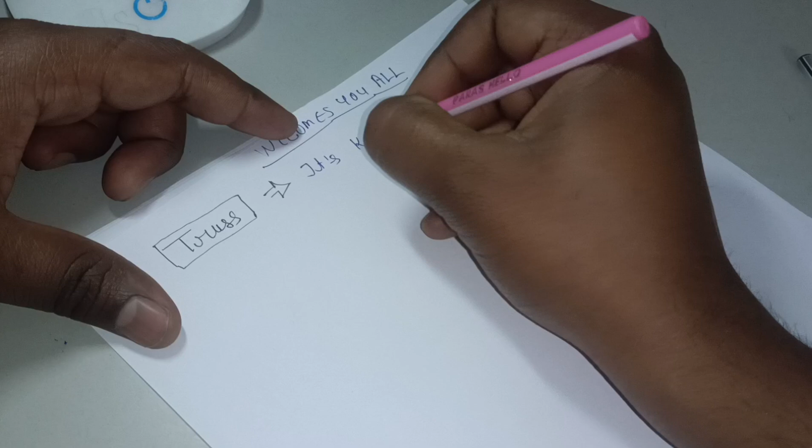So what is truss? If we want to write a definition, we can write it's a kind of rigid structure, rigid minded. What is rigid? What are rigid bodies? We can say rigid bodies are when we apply force on a body, the shape of the body, the dimension of the body, and the size of the body do not change, it remains same. That is called rigidity of a body. So truss is a kind of rigid structure.

Which consists of several, meaning many, members pin connected together to support a load.

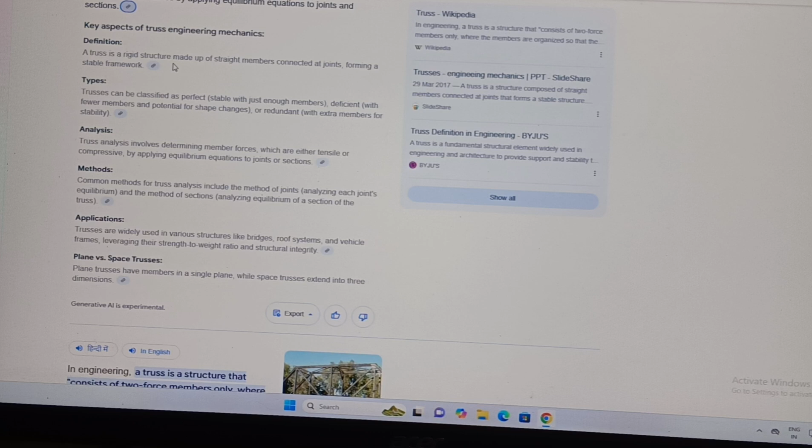Now, key aspects of truss engineering definition. A truss is a rigid structure, which I have told you. What does it mean by rigid? Rigid means if we apply force on a rigid body, then the dimension, the shape, and the deformation does not happen on that. So that is called a rigid body.

So a truss is a rigid structure made up of straight members connected at joints, forming a stable framework. Types of trusses can be classified as perfect truss and imperfect truss. What does perfect truss mean? If it satisfies the formula n equals 2j minus 3, where j is the number of joints and n is the number of members, then it is perfect.

If not, then it is imperfect. So this is something which he is trying to say in Google, okay.

So now let's see the types we have done. Analysis. Truss analysis involves determining members' forces, which are either tensile or compressive, by applying equilibrium equations to joints or sections.

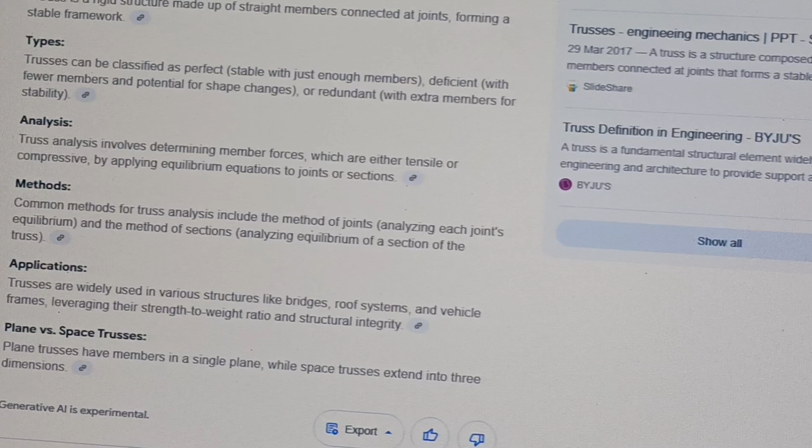Methods. Common methods for truss analysis include the method of joints, analyzing each joint's equilibrium, and the method of sections, analyzing the equilibrium of a section of the truss. Applications. Trusses are widely used in various structures like bridges, roof systems, which I have told you, and vehicle frames, leveraging their strength-to-weight ratio and structural integrity.

Plane versus space trusses. Plane trusses have members in a single plane, space trusses extend into three dimensions. So I hope I have told you this is the structure of these trusses. A truss structure consists of two-force members only, where the members are organized so that the assembly as a whole behaves like one.

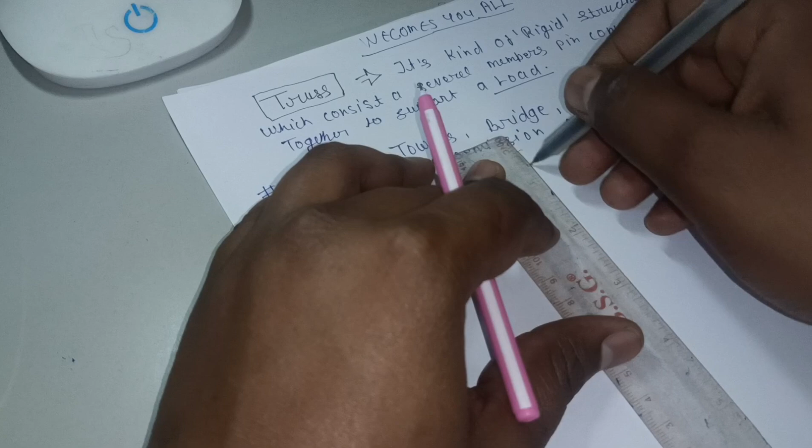So what question? Just take one example. I want to utilize maximum of this page, so I'm just drawing this in between.

Example, suppose we have a question. These are truss. This is A, this is B, this is C, this is D, this is E, this is F, this is G.

And one more thing, angles are also given: 60 degree, and this is also 60 degree, this is also 60 degree.

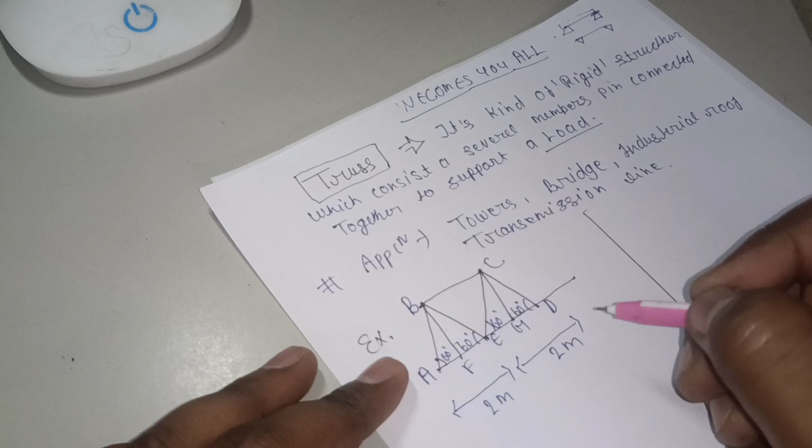Some more data is also given, like from A to E distance is 2 meter, from E to D distance is again 2 meter, total distance is 4 meter, and the force also given, it is 60 kilonewton. This is force, given downside, 60 kilonewton.

So now most of the time question will ask, now we have to find force at each point. What do I mean by each point? A, B, C, D, E, F, G. Each point we have to find the force.

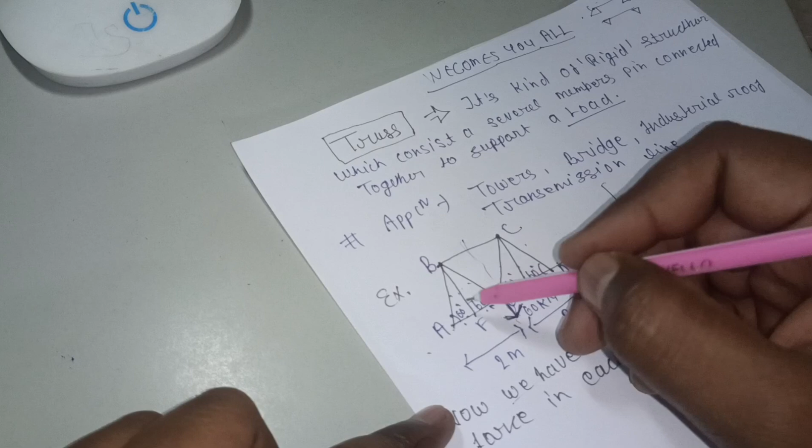Each point we have to find it. Now here I have several members. What do I mean by members? These lines are called members, 1 2 3 4, so these are members.

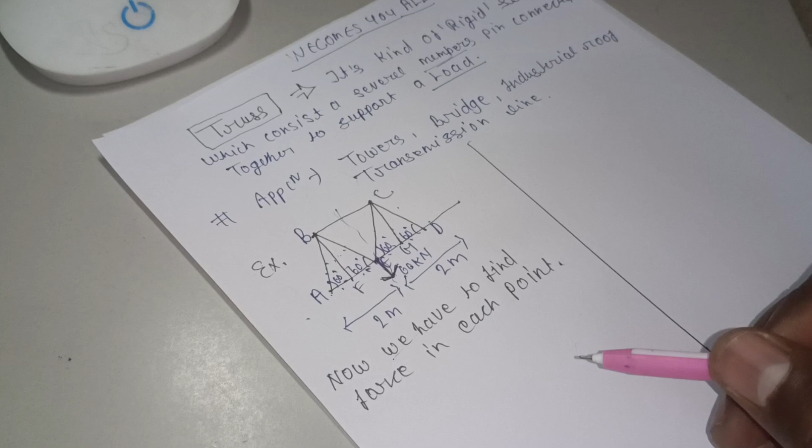So let's firstly see what should we do right now. Solution: first of all we have to draw a support reaction. One more thing which I have forgotten, these are trusses. Firstly, draw all reaction forces.

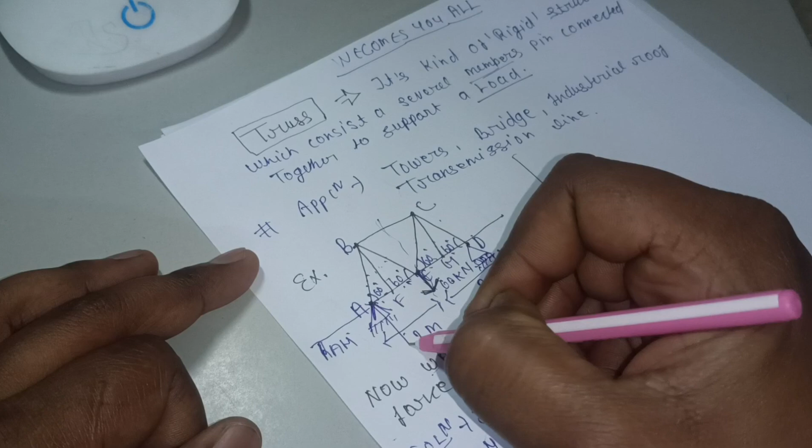So what are the reaction forces? We can see here. This is point A and the force is along horizontal, so reaction force will be RAH. Same here, there will be a vertical force, so reaction force will be RAV, V means vertical. And same thing also here, there's not any horizontal force, only vertical force, so here will be at point D, the RD force. These are reaction forces.

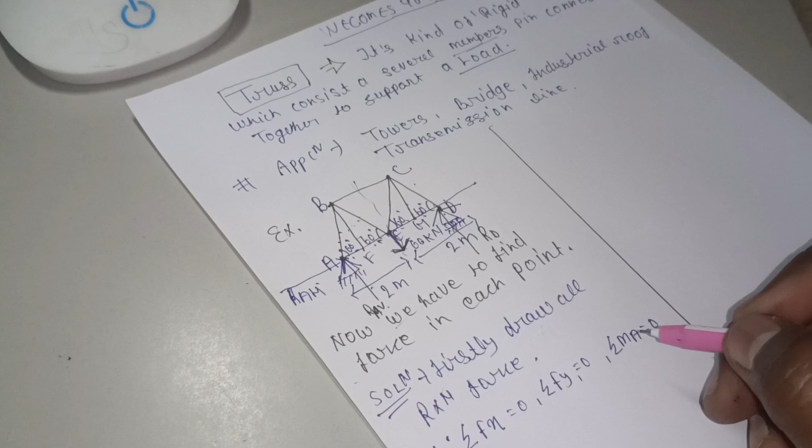So now we have to find summation of Fx, summation of Fy, and moment at point A, because first we will find the force at point A, that's why.

So summation of Fx, what do I mean by this? How many forces are applying in the x direction. X direction means horizontal direction. So this is only one force, which is RAH. So I can write only one force, RAH is equal to 0.

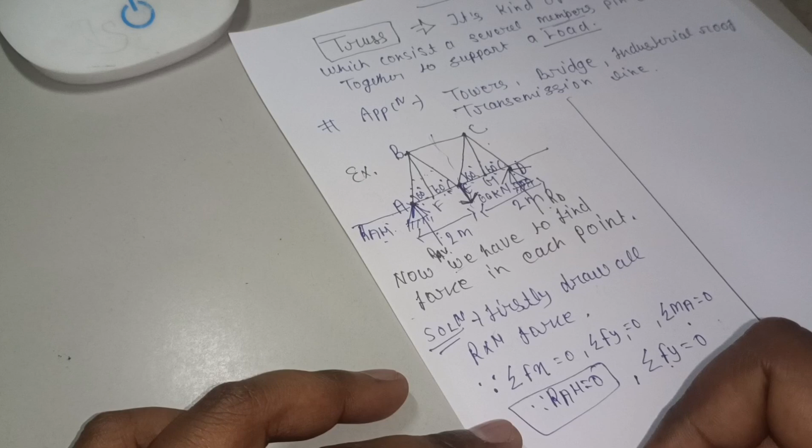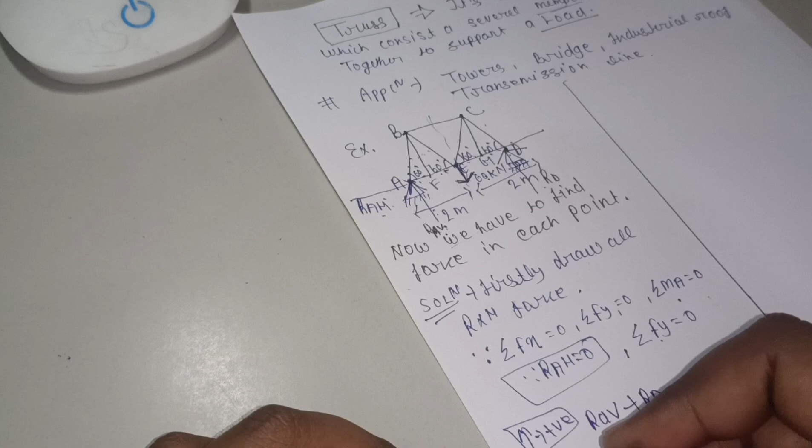And now we can find summation of Fy. What do I mean by summation of Fy? How many forces are applying in vertical direction. This is RAV in vertical direction, and this is also RD in vertical direction. This is upper side, if force is upper side then we take positive. So RAV plus RD, and this 60 kilonewton is downward, so if it is downward then we take negative. Minus 60 is equal to 0.

So firstly we need to know RD, because we don't know it, that's why we will find the moment. So moment at A is, moment formula is F into D. F means force, D means perpendicular distance of the force. So we are finding at point A. Force is 60 into distance is 2 meter, 60 into 2, and moment at A.

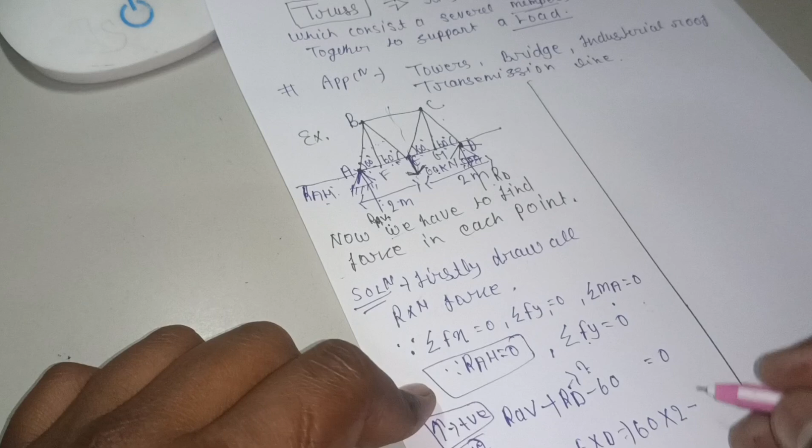If force is applying in this direction, and RD force is also vertical, upper side, if we take it then it will be anti-clockwise. Anti-clockwise means negative. So this will be negative RD into this side. RD into 2 to 4 means perpendicular distance 2 plus 2 is 4. So RD into 4. From here we can find RD: 120 is equal to 4 RD, so 30 is equal to RD.

Got it? So we can put the value here, it is 30. So 30 minus 60 is minus 30, and RAV is equal to 30. Okay, remember this is all in kilonewton.

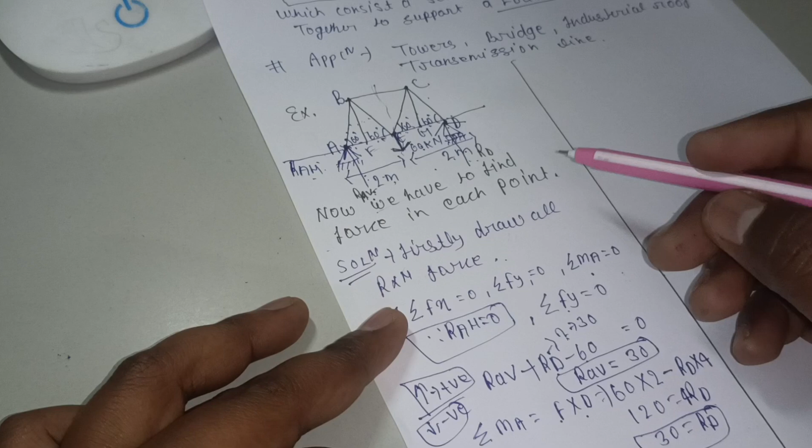So now we have found everything which we need to find a particular point force. So now we can simply do this, here we are finding reaction force at point A.

So we will draw the FBD, free body diagram of point A. So this is point A. Okay, so here we can see RAH, one force. So this RAH, and this 60 degree, and this is also another force.

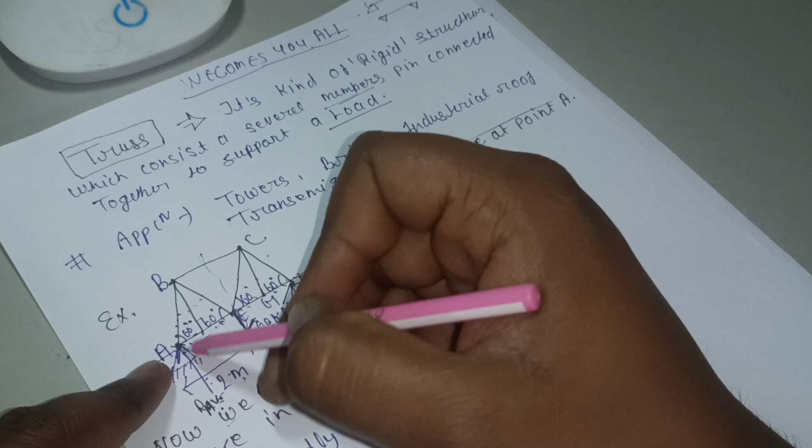And we have one more force, that is this. So it is RAV, this is RAH, and this is AB. So FAB force, this will be what? FAB force. Okay, and this will be what? FA and A and F. So this will be FAF force.

Angle is 60 degree. Simply we will just resolve this angle so that we can easily see how many forces are in horizontal direction, how many forces are in vertical direction. So this we can find.

So in x direction we write FAF cos 60. In y direction we write... sorry, this angle is in between FAB, not AF. Okay, so here will be FAB. Sorry, I did the mistake. FAB 60 degree, and here will be FAB sin 60 degree.

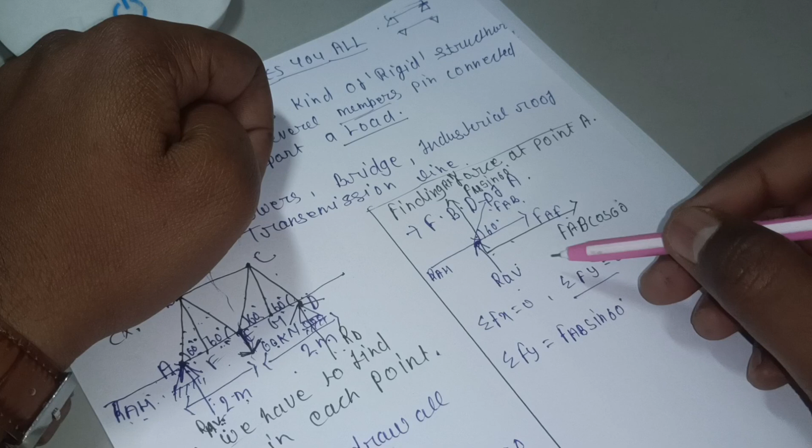We can easily find summation of Fy. So I am here finding summation of Fy. All upward force is positive, so FAB sin 60 and this is also upward, so plus RAV. Only two forces are applying in vertical direction. Okay, is equal to 0.

So we know RAV is, we have found it here, RAV is 30. So we can put in place plus 30. Sin 60 is root 3 by 2. So FAB root 3 by 2.

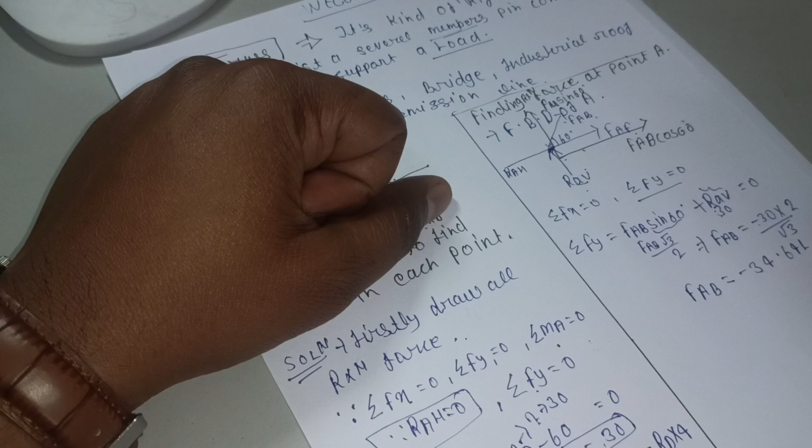So FAB is equal to, plus 30 will go that side, so minus 30, into 2 will go this side, then 2 upon root 3. So final answer of this will be FAB is equal to minus 34.641 kilonewton. Okay, so one more thing, if here is minus, then this nature will be compressive.

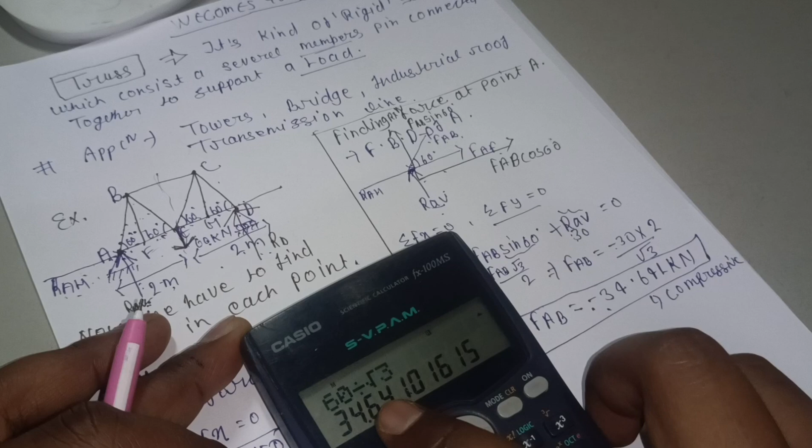Okay, if plus then tensile. So let me show. So this 30 into 60 upon root 3, 60 upon root 3, as you can see 34.64. Okay, so this is our answer.

Now we will see summation of Fx. So how many forces are applying? RAH plus, because it is rightward, and plus FAF plus FAF plus FAB cos 60 plus FAB cos 60.

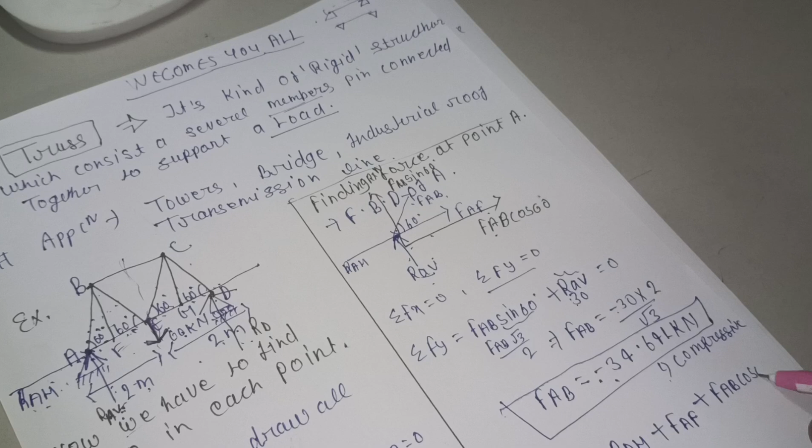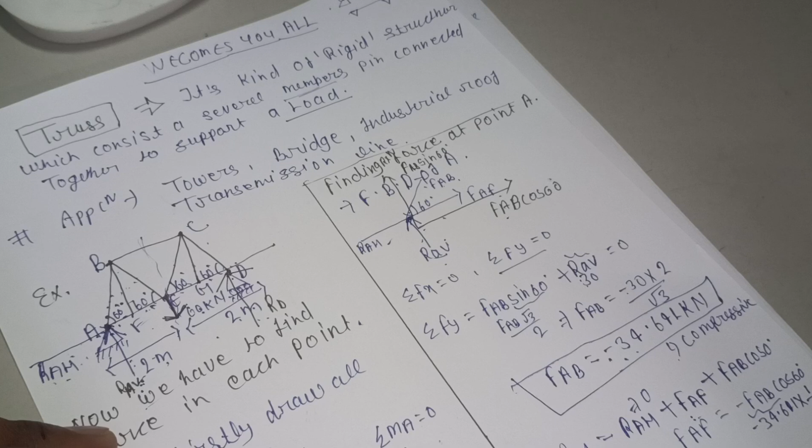So RAH is 0. We know that in this force we are applying it is 0, and FAF we have to find. So FAF is equal to minus FAB cos 60. Cos 60 is 1 by 2. FAB, we have found it, FAB is 34 minus 34.641. So FAF is equal to minus 17.32 kilonewton.

Okay, here we have to write it is, sorry, I was not able to, again here we have to write it is compressive. Why compressive? Because it is negative. Okay, so we have found the force on point A.

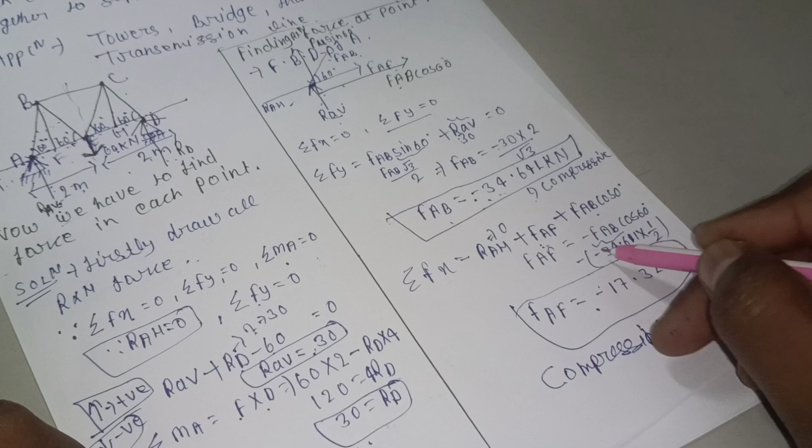Okay, so let's move ahead. Now we have to find force on point F.

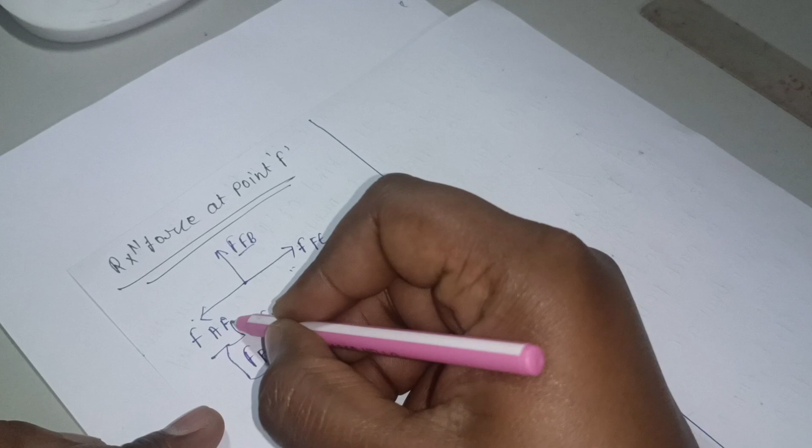Okay, so here only 3 forces, so these both are acting as horizontal forces. So we know that summation of Fy is equal to 0. Now summation of Fx will be equal to 0, so FAF will be equal to minus FFE. Okay, so we have found FAF.

We will simply put the value. It is plus 17.32. FAF is 17.32, is equal to minus FFE. So this minus will be here. So it is compressive.

Oh sorry, again I have to take care of it. It is rightward, so it is left but not rightward. This will be FAF minus, this will be minus, remember this will be minus, so here will be minus. So this to this will cancel - it will be tensile.

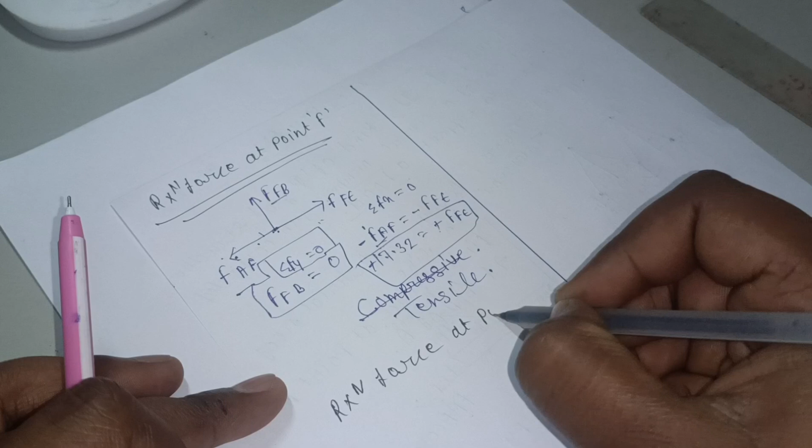So okay, now we will find reaction force at point B. Reaction force at point B - so see this, it is B. How many forces are acting? This 1, 2, 3, 4. The number of forces are 4. Let's do it, it is B.

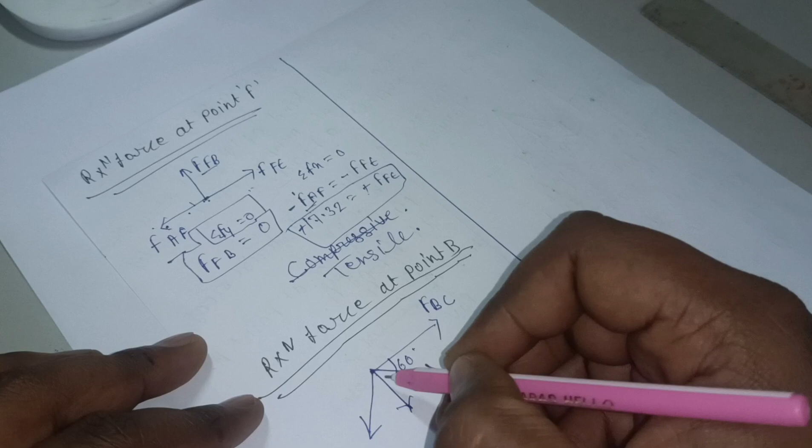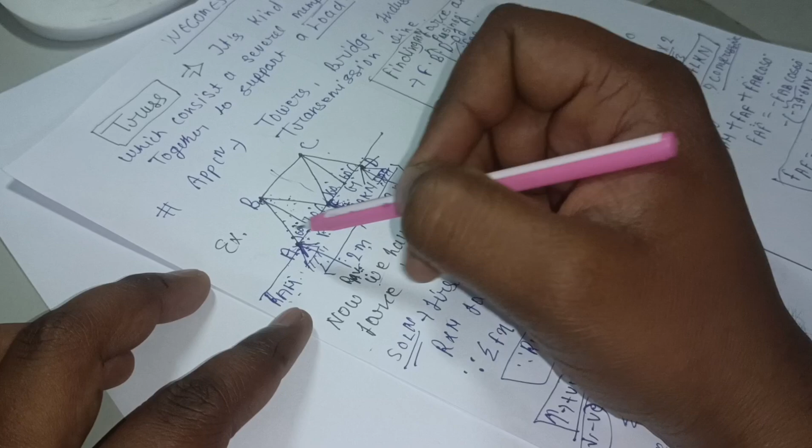Firstly, this force - what we will call this force, it is F of BC. So it is F of BC, and one force in this direction, 60 degrees. Here's also 60 degrees. So remember, this angle will be complete, so by reflection angle it will be also 60. And this force name will be F of BE.

Why, we can see this, it is E point. So F of BE, and second will be F of BF and F of AB. F of AB is F of BA. So F of FB will not be considered because it will be 0, so it doesn't matter. We can see here there is no force acting, it is kind of a support, so it will be 0.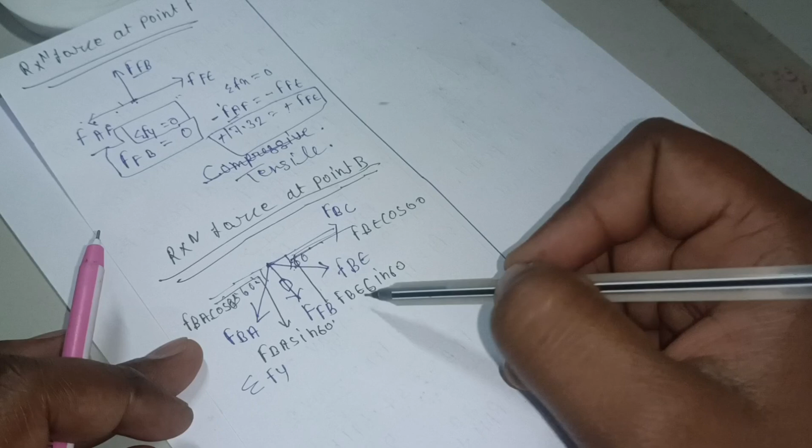Okay, so now we can simply find it. First of all, summation of Fy. First of all we resolve this. Difference between this angle and this - it is FBE sin 60, FBE cos 60. Same also here - FBA sin 60, FBA cos 60. Okay, so now we can see how many forces are applying in x direction and y direction: 1, 2, 3 forces are in x direction.

So first of all we will find summation of Fy is equal to 0. So in y direction, this is in y direction, this is in y direction, and this FB is also in y direction. It doesn't matter whether we write it or not, because it is 0, because no force is acting. So I can write here minus FBE sin 60, minus, because it is downside, minus FBA sin 60, FBA sin 60, minus FB - we can write or not write, it doesn't matter.

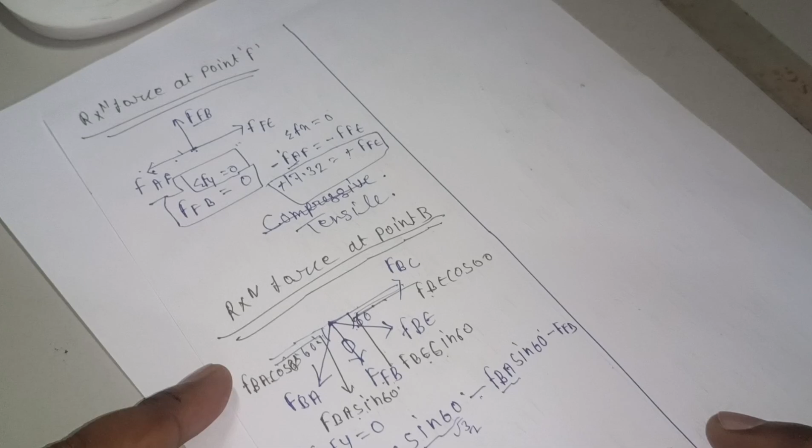So sin 60 is root 3 by 2, okay, minus FBE root 3 by 2, minus FBA - we have already found the value of FBA. Where is the value of FBA? This is FAB, BA, doesn't matter, minus 34.64. So FBA is minus 34.64, sin 60 is root 3 by 2, is equal to 0, because this will be 0, doesn't matter. So it will be 17.32, so this side minus minus plus, and that side it will go again minus. So FBE is equal to 17.32 into root 3 into 2 upon root 3. Root 3 to root 3 cancel, and this will be minus, remember this, and here also it is minus.

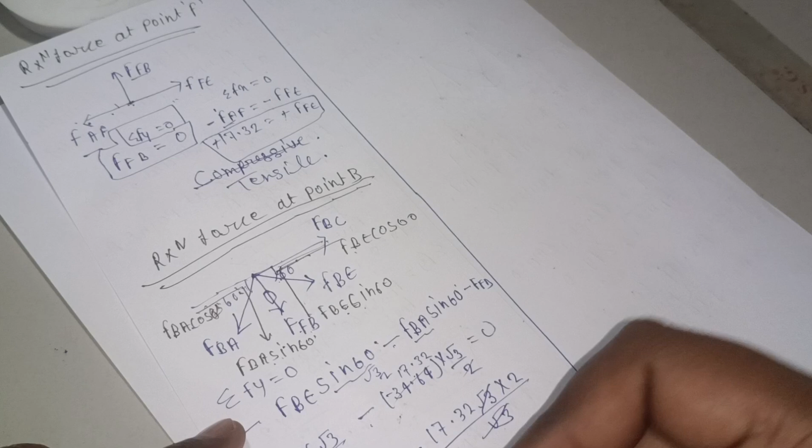So FBE is equal to 17.32 into 2, it will be 34.64 kilonewton. Remember it is positive, so we will write it is tensile.

So we have found it. Now summation of Fx. How many forces are acting in x direction? It is FBA cos 60, leftward, so negative, minus FAB cos 60, minus FAB cos 60, and plus FBE cos 60 plus FBE cos 60, plus FBE cos 60. One more thing, it is in right direction, so F plus FBC is equal to 0.

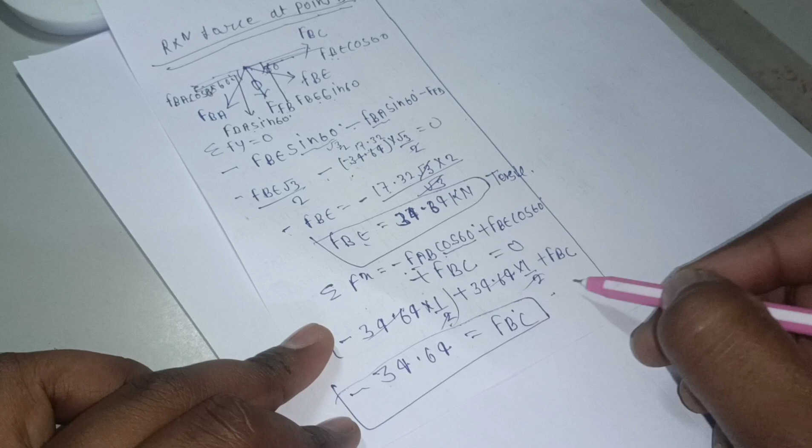So here you can see minus FAB cos 60. What was the value of FAB? FAB value was minus 34.641. So here we will put minus 34.641. So this will be minus minus positive. So 34 means it will be 17 point something. This will be also 17 point something, means again 34.64 minus is equal to FBC. So this will be compressive. I'm writing only C, it will be compressive.

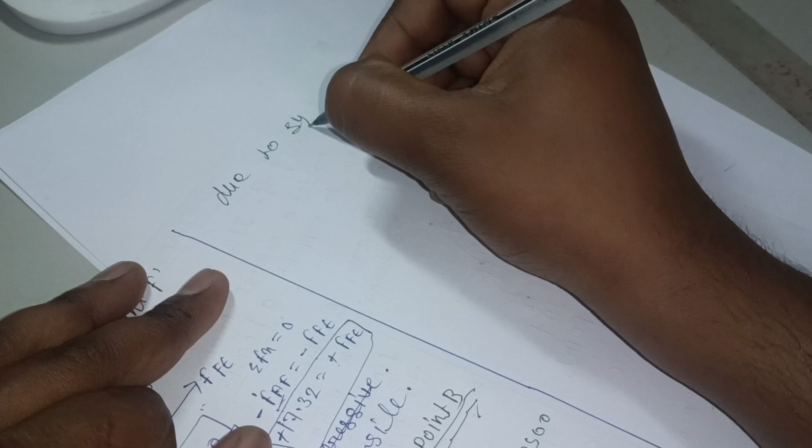So now almost we have found the force at point A, point F, point B, and hence we can write here, due to symmetry of the structure, FCD is equal to FAB, FGD is equal to FAF.

From where I am referring this point here, you can see this FCD, for any force in CD, this C and D is equal to force of FAB. This is equal, this is equal, this is equal, this is equal, this is equal, this is.

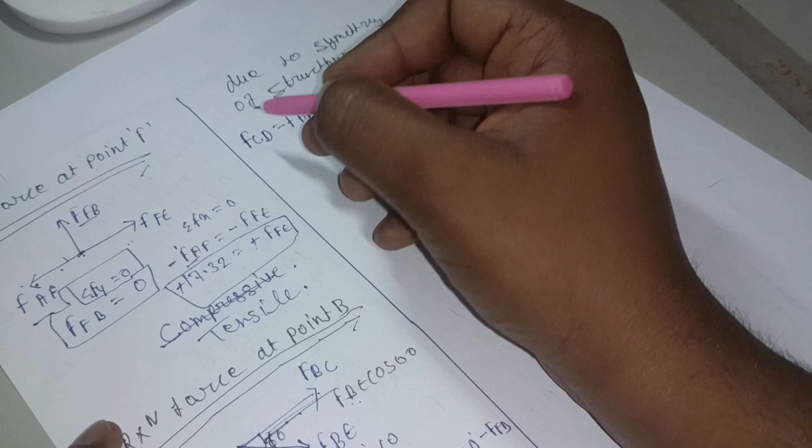Okay, so I'm just writing here FCG is equal to F of FT, F of CE equal to F of BE, and F of EG is equal to F of EF.

And till now the question here is not complete. We have to draw a chart. It is something like this: serial number, first of all how many forces are here, and magnitude. So first of all, there are 5 forces, 1, 2, 3, 4.

So first of all, FCD, here one more member comes, which is force in member. So this nature, there should be one more line here, force in member, and what to do, so serial number, force in member, second line magnitude, third is nature. Okay, serial number is 1, 2, 3, 4.

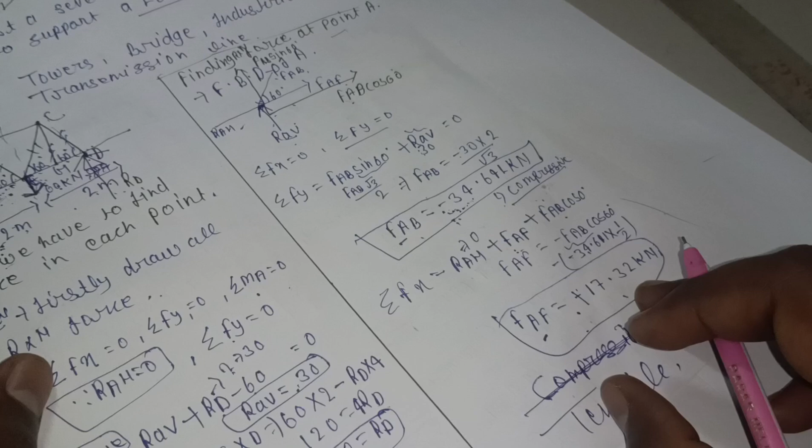Okay, and FGD is equal to FAF. FGD equal to FAF. So FAF is 17.32. It is tensile because this is positive, and same we will write here.

These also for FCG, comma FT. FCG is FFT... where is FFT? Here is FFE, here is FFE, FEB... where is FFT? Okay, FFT is not there, sorry, there is no such force.

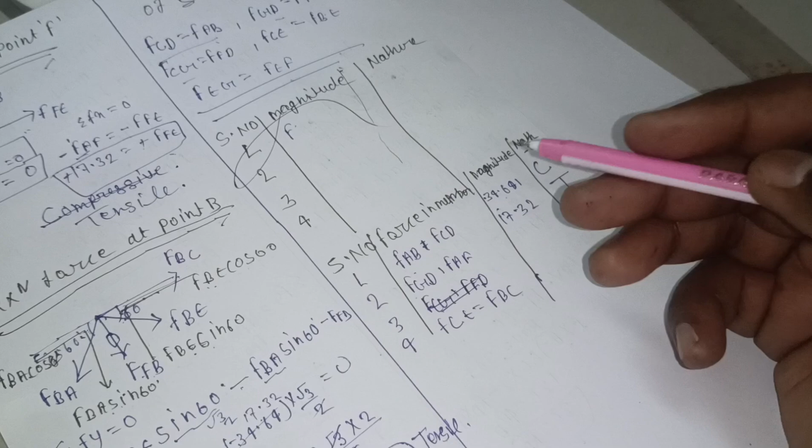Okay, so this is how we make the chart, and this will be considered as the final answer. Final answer. Okay, so next let's move on to the second question.

So now we will see example number 2 on the truss. We are solving truss by joint method, because we have two methods while we solve truss: one is joint method, another is section method.

Okay, so in this question we have given this diagram. This is point D, 100 kN, and this is point A. Here is one truss. This is point B, here's another truss.

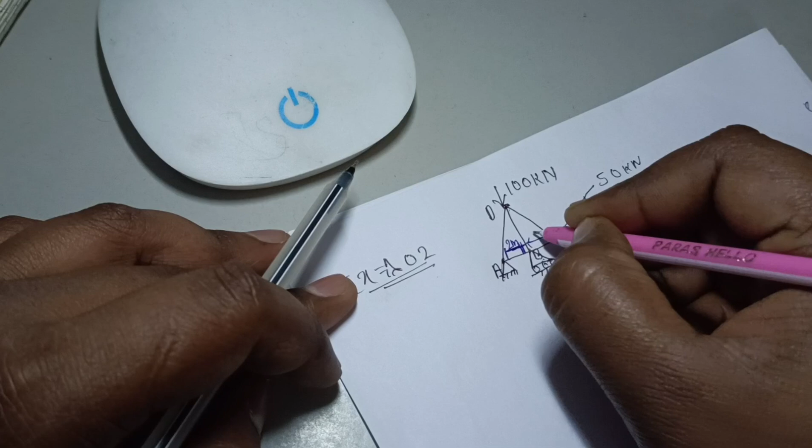Okay, so some more information is given. It is 2 meter from here to here, 2 meter again, and it's becoming very congested. Total is 4 meter from A to C.

Okay, so we have to find force in each point.

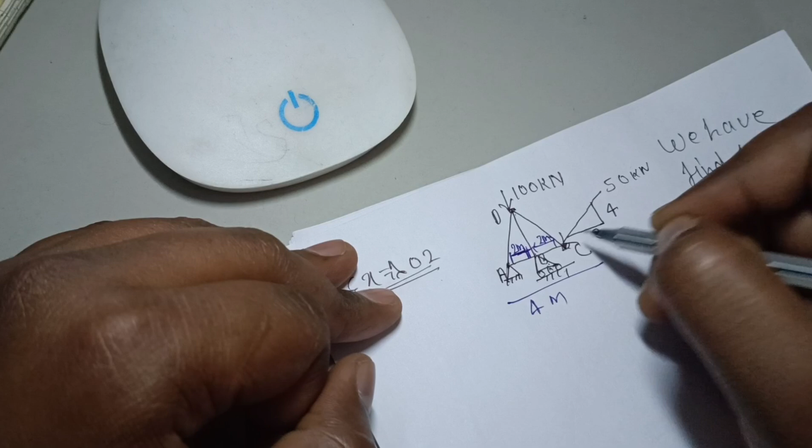So first of all, what we see is where is the maximum number of members. We can see that here is maximum number of members, that is in C. It will be easier to find whatever we have to find, so I'm just drawing here.

FBD means free body diagram of C.

Okay, so first of all, as you can see here, 4 and 3 is given. This is perpendicular and this is base. So we know tan theta is equal to perpendicular upon base, so it's 4 upon 3.

The angle will be tan inverse of 4/3, which is approximately 53.13 degrees. Okay, so this is our angle.

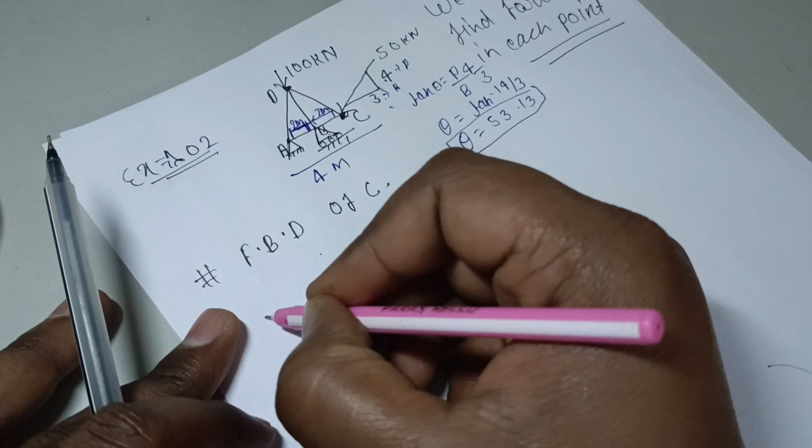So now let's draw C. What we do while drawing FBD is we see the forces. Generally we keep all forces outwards from the points. So this is point C, suppose this is C. Now one force is coming from here.

So it is FCD, it is FCD, it is FCD, and one force is coming from horizontally, so it is this, FBC.

Okay, and one force is this, that is 50 kilonewton, coming inside. Remember this. And the angle is 53.13.

So now we have the angle, but while solving this diagram, we need also this angle and this angle. So what we will do, if we use some brain, here we can easily find the value of this angle, like C. So this base is given 2 meter.

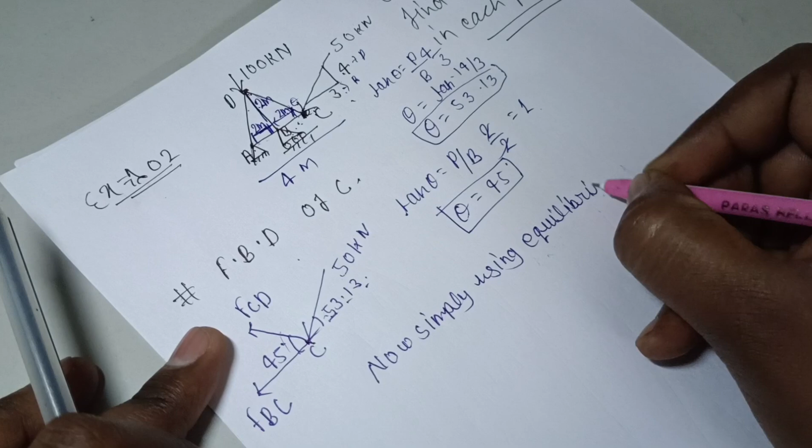It's very simple. Okay, so now we have this 45 degree angle, so we will say this is 45 degree angle. Now we can easily solve by using the equilibrium conditions.

So first of all, we will do component of this one. So this is x-axis and this is y-axis. Remember, this is that side of the line, so the angle will be divided something like this. So it doesn't mean... okay, so this will be this side.

So on this side, 50 cos 53.13, and on this side, 50 sine 53.13. And now this is, so it is FCD cos 45, and FCD sin 45.

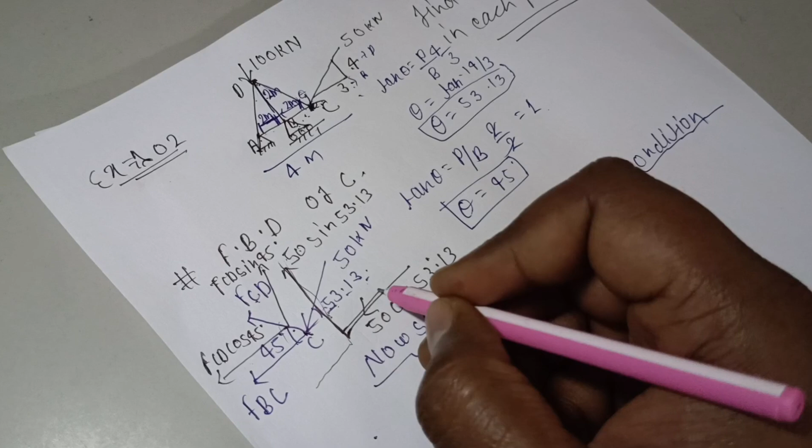Now simply we will see how many forces are going in x direction and how many in y direction. We know that if it is in positive x direction, right side, we consider it positive, or this side we consider negative. It's very simple. So you'll be thinking why is this side, it should be this side, right?

So for this, I want to say that this force is applying on the opposite side. All this force should apply that side. Then we can write that this force is also downside. So this force is opposite, that's why we are applying. The forces will be downside, this will be downside, this will be right side.

So first of all, we are doing summation of Fy. Why are we doing summation of Fy first, not xy? Just because if we do summation of Fy, we have this in downwards and this in upwards, meaning we have only two, and we have to find only one value that we can easily find, that is FCD.

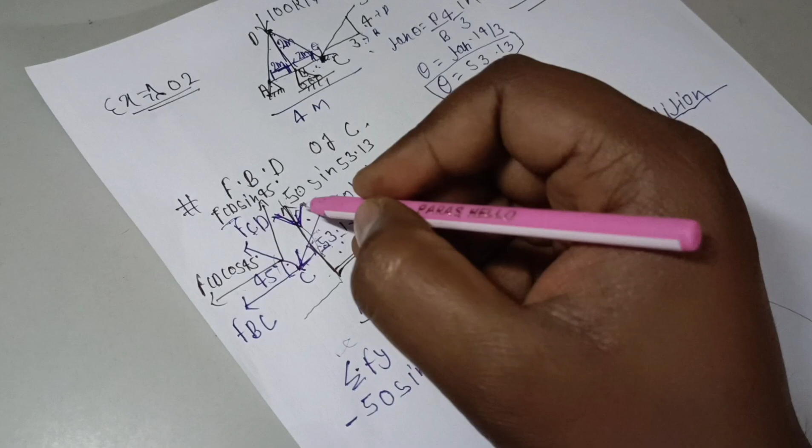Okay, so summation of Fy is equal to 0. Firstly, it is going downside, so 50 sine 53.13 is negative. It is going downside, and FCD sine 45 is going upwards, so plus FCD sine 45 is equal to 0. So this will go that side, then FCD sine 45 is equal to 50 sine 53.13.

So although I have already calculated, sine 45 is 1 by root 2. So for sine 53, this whole value will be 40. So root 2 will go that side, so 40 into root 2. So FCD is equal to 40 into root 2, which is around 56.568 kilonewton. Remember, this value is positive, so we will write it is tensile.

Okay, so successfully we have calculated FCD. We have calculated this force, that is FCD, this force.

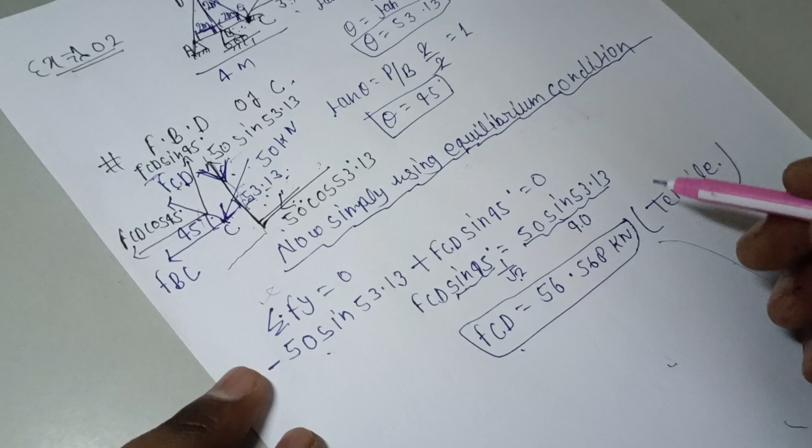Now which point we should select. Again, remember that we have to find where is maximum number of members. So we can see maximum number of members now in 1, 2, 3, 4, so D. So now I'm drawing

FBD of point D. Okay, so we can see in D there are 4 forces, 1 2 3 4. So firstly, this is point D.

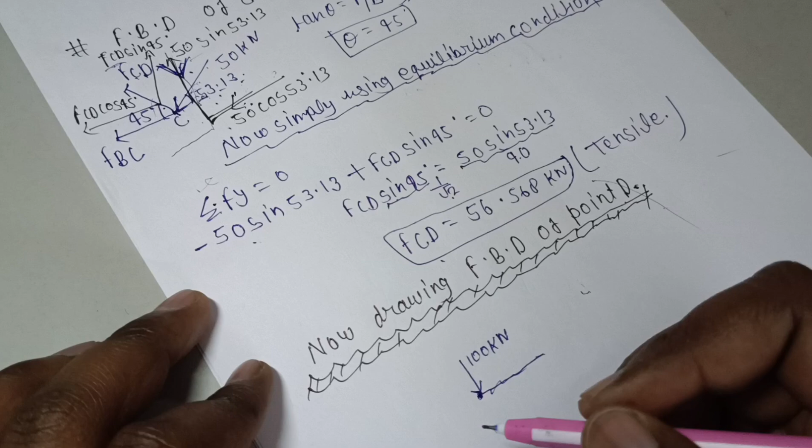One force, that is 100 kilonewton. Other force, that is... sorry, there's not any force in this direction, so it is wrong. So now we have one force, this one, we have one force, this one, one force, this one, and another force is this one. Let me name it.

So this is F, this is F BD, this is another force, this force, so this is F BD, okay, and this is F CD, this is F CD, and this is F AD, okay. So successfully we have drawn the diagram of D point.

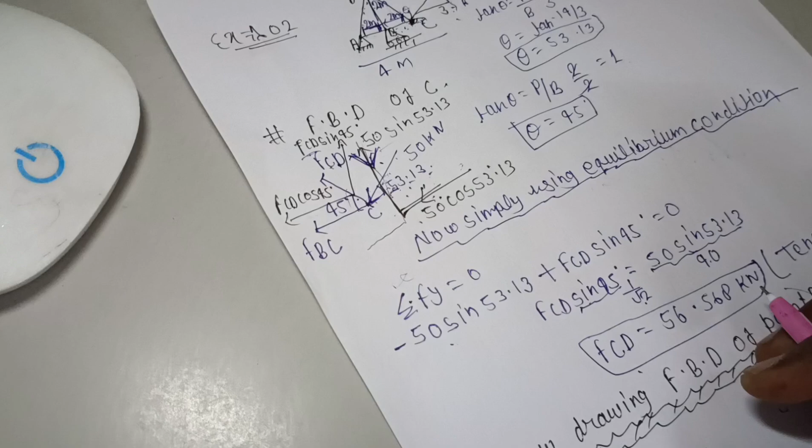So now the main point comes, that is finding the angle, okay. So remember again the same thing, that is this one. We can simply calculate angle because we have given base, we have given perpendicular, so perpendicular upon base, that is tan inverse 2 by 2, that is 1, so 45, okay. So again I am just doing directly, so theta is equal to 45.

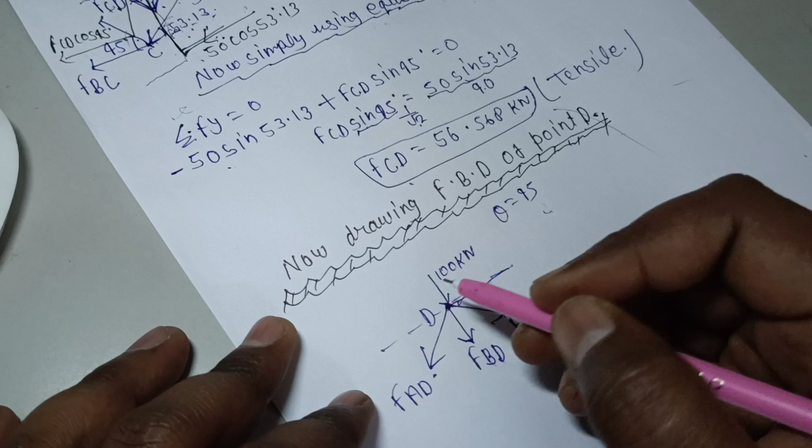So what will be here, this... so I can write here, this is, let me change the pen, this is 45, okay, it is 45 because these two angles are given. If it is 45, then this will be also 45, this will be also 45.

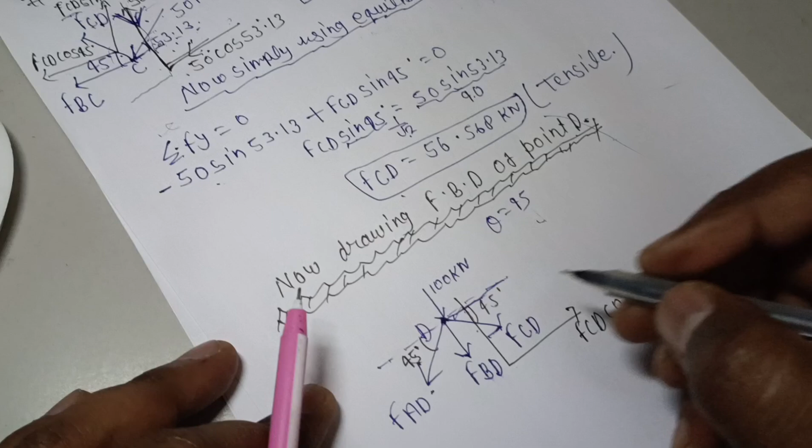Now we can simply solve the components and we can easily find the value. So here it is FCD cos 45, it's FCD sin 45, and it is again here

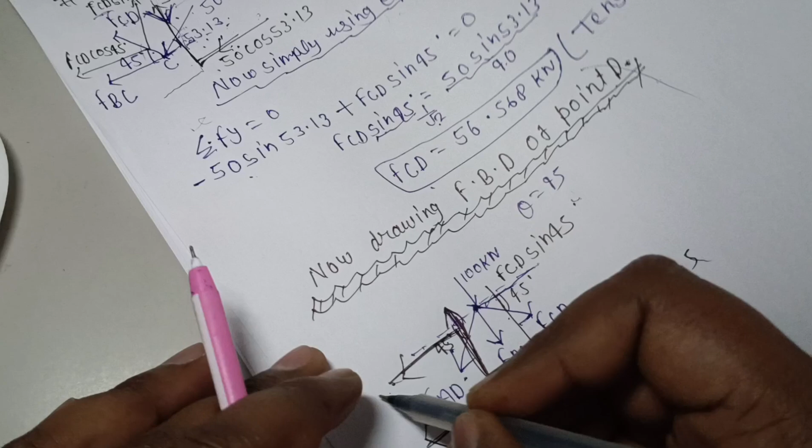Sorry, this will be something like this, it is FAD... no, that was right, it was right, FAD sin 45 and FAD cos 45.

Now again using condition of equilibrium, okay. So condition of equilibrium, summation of fx,

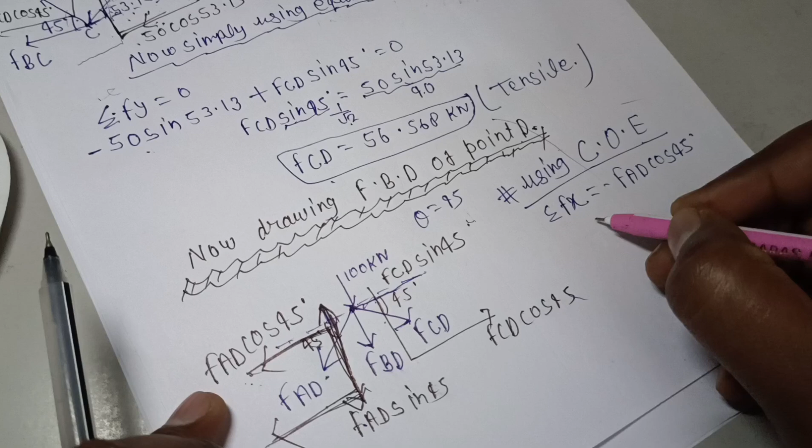first of all we are doing summation of fx, then how many forces, this is in fx, that is FAD, it is leftward, so minus FAD cos 45, plus FCD, why plus FCD, because this is in right direction, FCD cos 45, is equal to 0, okay.

So simply we can solve it from here, this will go that side, then it will be positive. We know value of FCD, it is 56.568, so 56.568 cos 45 is how much, 1 upon root 2, let me use calculator,

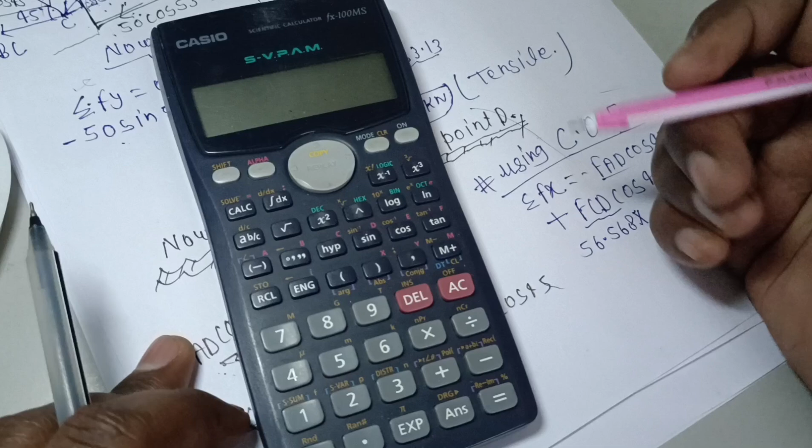It's become a bad habit now. Before, in 12th class or IIT JEE preparation we were used to do all calculations from our mind, and now just if we want to multiply even, then we use calculator. I don't know why.

So cos 45, let me remember, cos 45 is 1 by 2... 1 by root 2... 3 by 2... 1 by root 2. That is 1 by root 2 is equal to FCD, sorry, FCD... FAD. Again, cos 45 is 1 upon root 2. So this will cancel. So FAD is equal to 56.568 kilonewton. It was very simple to calculate this one.

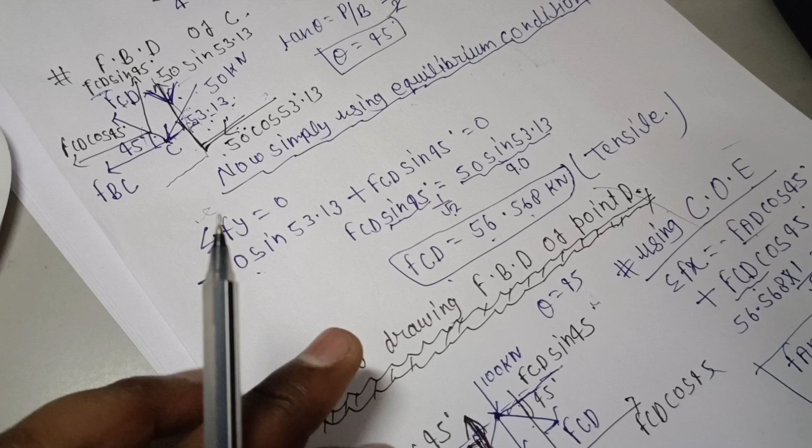Okay, so I hope you have understood how I calculated forces in 2 points. This was FAD. Now we will solve the summation of Fy.

Now we will solve. I was forgetting this just. So please remember that there are two: summation of Fx, summation of Fy, and in some cases we have to find the moment about A. Okay, so summation of Fy.

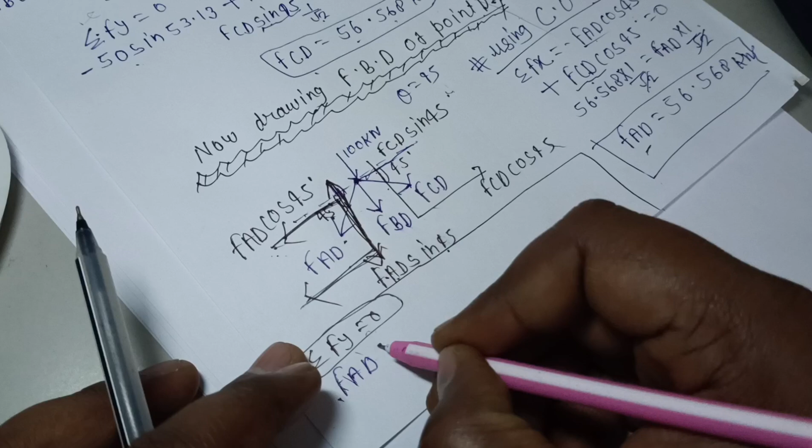I'm just writing it directly. We know how many forces. This is FAD in downward, so minus FAD sine 45, minus, and this is upper side, so FCD sine 45 is equal to 0. Okay.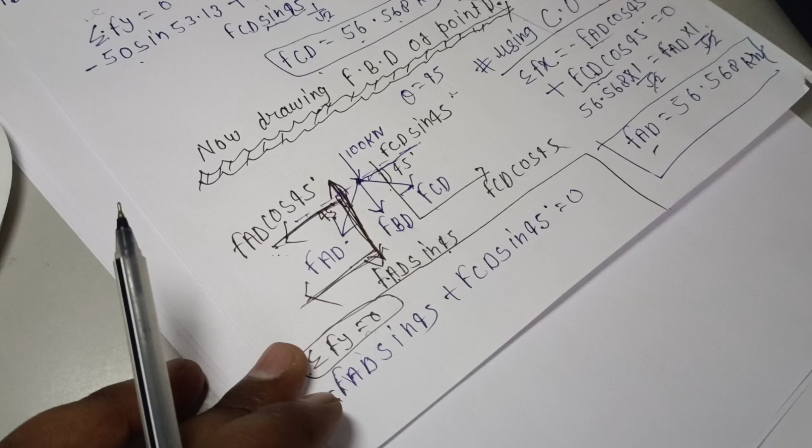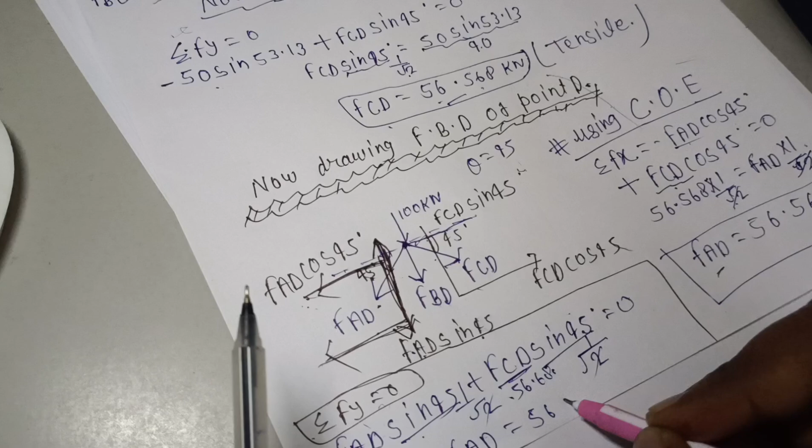FAD, we have already found the value of this, 56.68. So it will be 56.68. Okay, if this goes to that side, then this to this will cancel. FAD also will be 56.68. Okay, so both values are the same.

Oh shit man, shit. This is also a force in y direction.

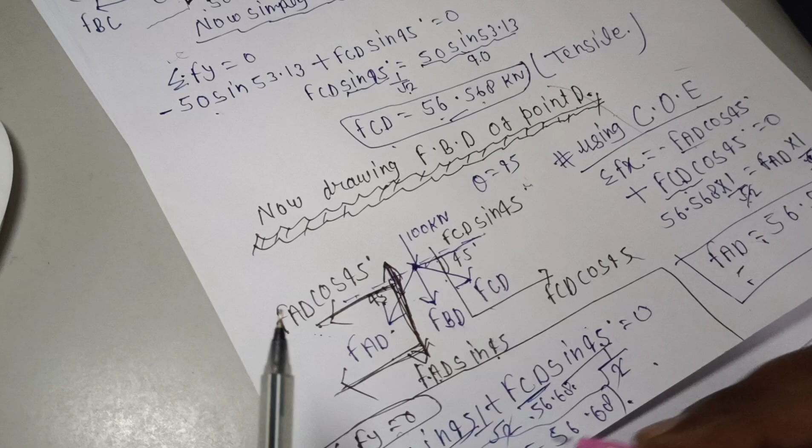If it's downward, so minus FBD. Okay, minus FBD. So we have found it already. FAD is 56 point this. So this will go that side.

Shit, let's solve it on the next page. First of all, let me draw the line.

So now here we are solving summation of Fy equal to 0. Remember, how can we forget that? Here is 4 forces. 1, 2, 3, and 4. Okay, so first of all, downside.

This is, we have to find FBD. Okay, so FBD minus FAD sin 45 minus FCD sin 45 minus 100. Why 100? Just see this, it is downside, so that's why minus 100, is equal to 0. So sin 45 is 1 by root 2.

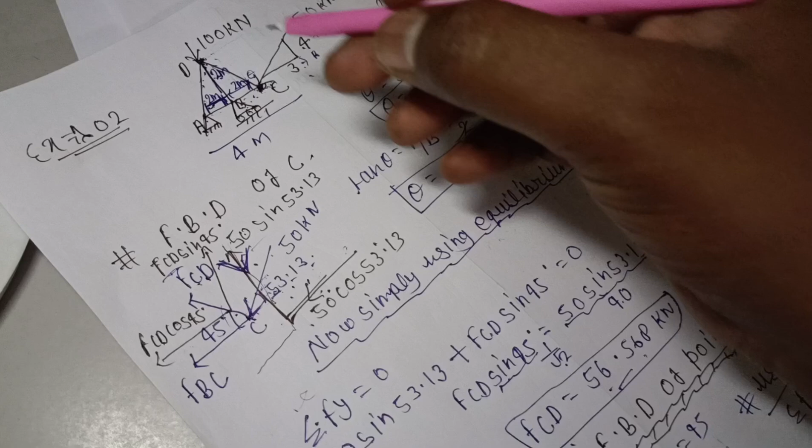And now we will find the force at point B. Why B? You know it, that here is 1, 2, 3 forces, and we can all easily find it.

So now drawing FBD of B point. So remember this, that we have one force, two force, three force in x direction, y direction. I'm just drawing this. Yeah, one more thing, that also this is truss, so we will consider it as RB.

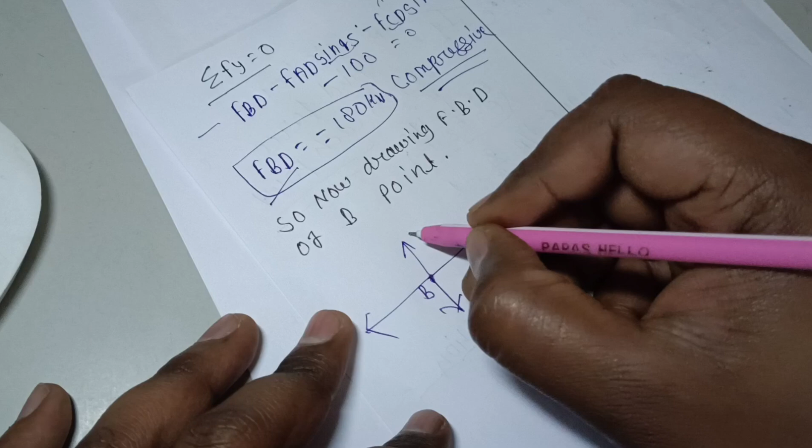This is point B. One force is to the upside of the point, this, and this. It is FBD, that was D, and this will be FBC, and this will be RB. Sorry, this force will apply upward. This is RB, this is FAB.

Okay, so now simply we have to solve it. We do not need to do so many things. What we have to find? We have to find this FBC, no? This FBC. How many forces applying in this direction? So this will be equal to FAB. It means that FBC is equal to FAB.

Thus doing summation of Fx equal to 0. Okay, so FBC is equal to FAB. So we know that FAB is how much? FAB, we even didn't calculate FAB till now. FAB, where is FAB? No.

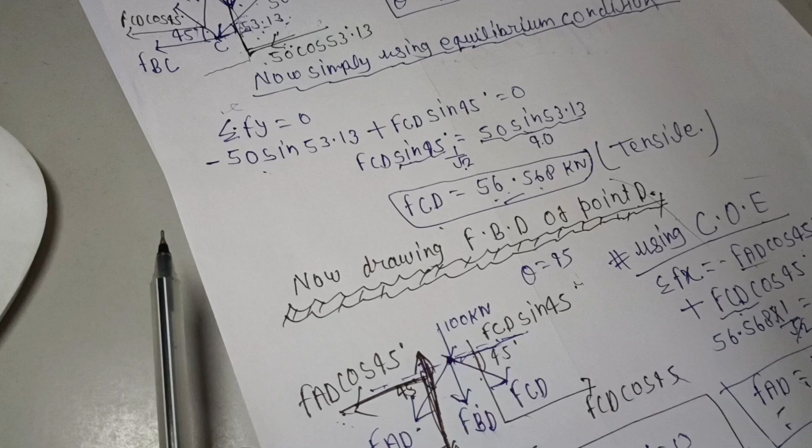FAB, FCD, FAD, what we need? FAB, we have FBD. So now firstly we have to calculate FAB. So then after we can find it. So for finding the FAB, finding A means FAB means

this point A. So point A, if we are finding FAD, we have FAB, our horizontal direction force, or vertical direction force.

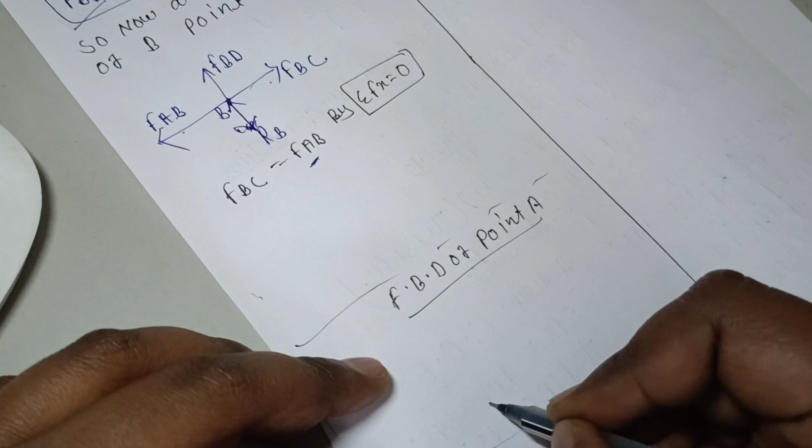Let's try to find FAB. Firstly, now here I am drawing, giving some space, FBD of point A. Because how many forces are applying here? This force A, this point A, and one inclined force to this, and another force is this. It is FAD.

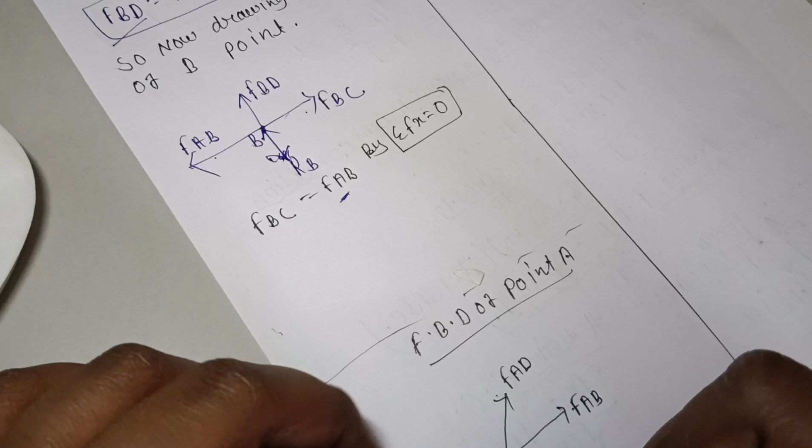FAD, and it is FAB. Is FAB, and one force will be horizontal force, means R of HA. This force will be horizontal force, so R, the reaction in horizontal force, so this will be R of HA. This will be in vertical force, and reaction in vertical force, or we can also write A. Okay, so here we have total these.

So remember, we can again find theta, that is tan inverse 2 by 2, that is 45 degree. This will be 45 degree. We have already FAD. FAD is 56.65, and FAB, we have to find FAB, and horizontal force is not giving, vertical force is just not giving.

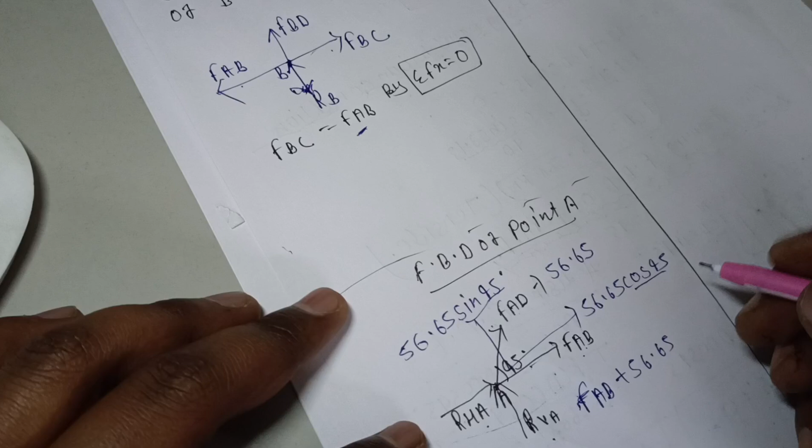Suppose the angle of this will be 56.65 cos 45, 56.65 sin 45. Sin 45 is 1 by root 2. Yeah, so F, this is x direction, so F of AB plus 56.65 cos 45 is 1 by root 2. Is equal to

But from here we can easily find the FAB, that is 28 something, 28 something we are getting. FAB we are getting minus 28.32. It is compressive. Okay, so we will put here, this will be minus 28.32, it is compressive.

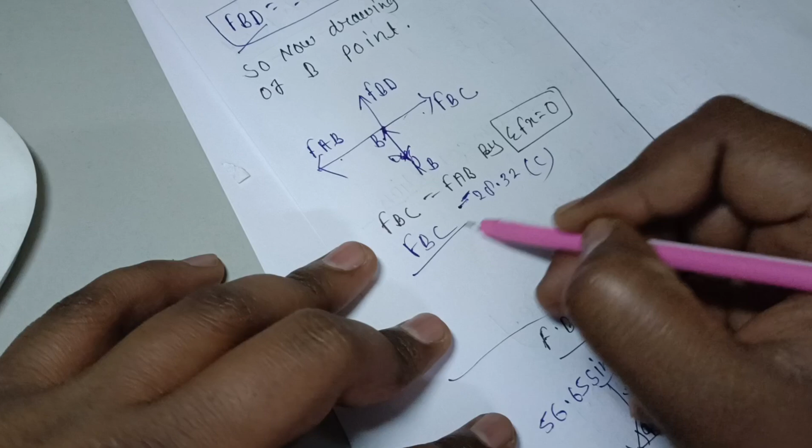It is FBC. Okay, so now we have to simply make the chart, which I have told you already, that we will write here serial number, force member, force in member, and here will be magnitude, here will be nature. Okay, now simply nature means that, if negative, then this will be compressive.

Okay, so here we have solved 2 examples on this. Now again I'll try to explain in an easy way the same concept. I don't know why, but I'm not getting satisfaction that I have discussed something new. That's why I don't know why I have discussed these questions.